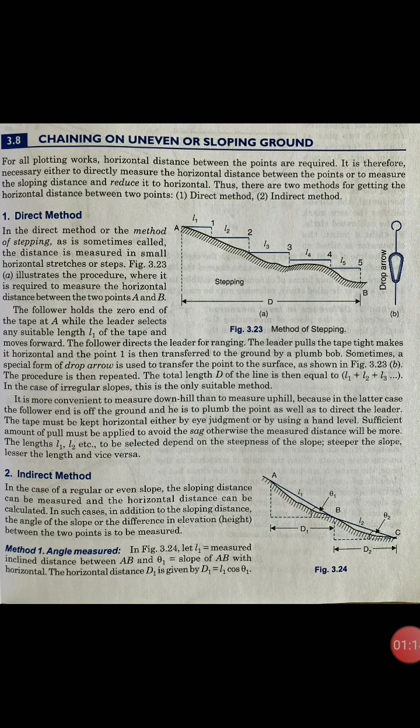So here, to measure the horizontal distance between 2 points which are located on a sloping ground, we have different methods available. You can see here, first one we have direct method, and one more we have indirect method. Again, in indirect method we have different methods to measure the distance between 2 points which are on the sloped ground. Don't get confused with direct ranging and indirect ranging. Both are different. That technique is for ranging and this is for chaining. Okay, this is direct and indirect methods for chaining on a sloped ground.

First one we will study direct method. See here, this method is also called as method of stepping. So in that case, I will take an example of point A and B located at some horizontal distance D. So if I need to measure the exact horizontal distance between point A and B, I should establish the intermediate points such that at the end, if I sum the horizontal distance between each and every interval, I will get the total horizontal distance.

Okay, so you can see here, if I start from point A, I will stretch the tape to some extent, say L1, and I will hold the ranging rod at point 1, and I will drop the plumb bob from point 1 to the ground. Plumb bob I have shown you in the introduction class of the chaining. Once I stretch the tape to some interval, say 2 meter, 4 meter, 5 meter, whichever is convenient to us, say at distance L1, after stretching the tape, I will drop the plumb bob from point 1 to the ground level, and I will transfer the point to ground again.

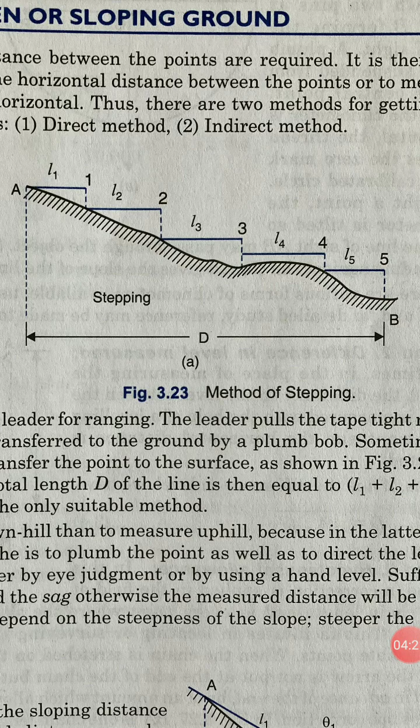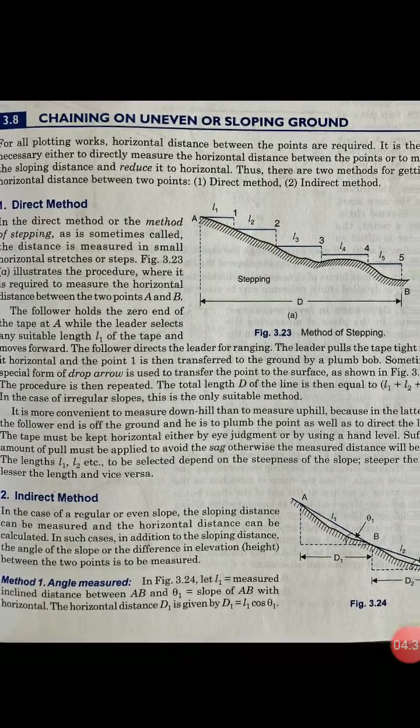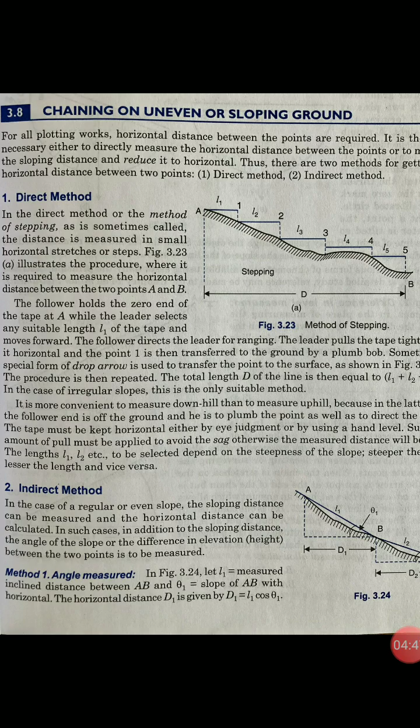Next we have indirect method. In indirect method, again we have various types. So first one we will study angle measured, in indirect method of measuring the horizontal distance between 2 points which are located on the sloping ground. You can see the figure here. So to get the total horizontal distance between point A to C, I have established intermediate point B such that that forms a triangle. You can see the dotted line here, which will give you the angle theta 1 at first triangle and angle theta 2 at the second triangle.

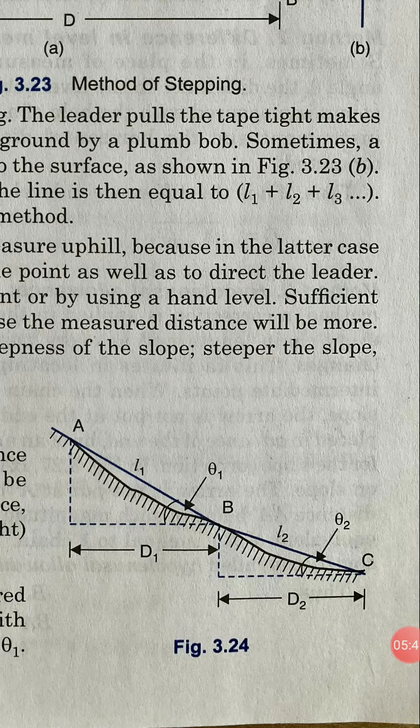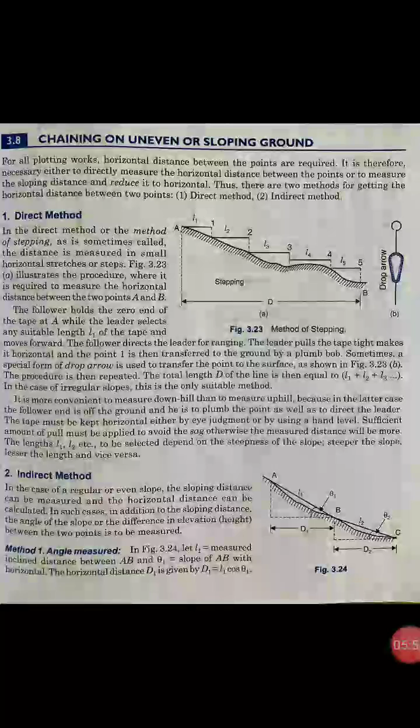So once I get the hypotenuse L1 of one triangle and L2 of other triangle, and the angle theta 1 or theta 2, I can easily calculate the horizontal distance d1 and d2. The total horizontal distance will be again the sum of d1 and d2. So this is indirect method of measuring the horizontal distance between 2 points which are on the sloping ground. First one is angle measured. I am measuring the angle here. See here in figure 3.24, let L1 be measured inclined distance. Inclined distance I will measure. Then theta 1 is slope of AB with horizontal.

The horizontal distance d1 will be then given by L1 cos theta 1. So if I know the theta 1 and the sloped distance L1, I can easily calculate the horizontal distance d1 by using cos equation. Cos theta 1 is nothing but d1 by L1. d1 will give you L1 cos theta 1. The same thing for the second triangle. d2 will be L2 cos theta 2. If I sum d1 and d2, I will get the horizontal distance between point A and C. So this is the first method in indirect method, that is angle measured.

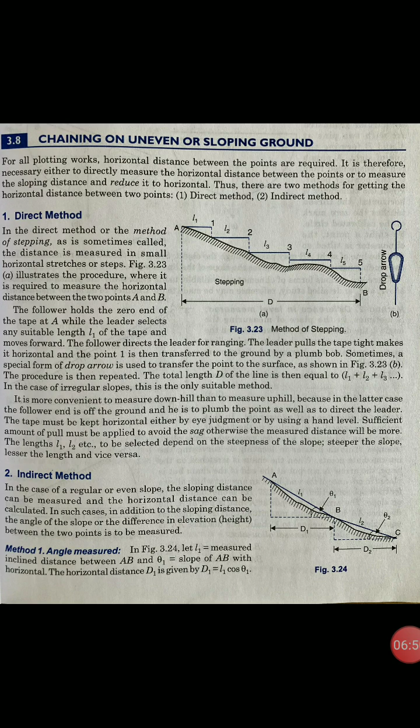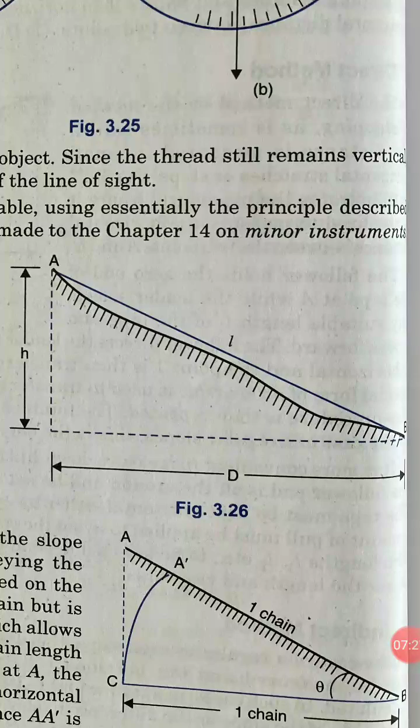So next I have method 2, difference in level measured. Point A and B located on the sloped ground, I will measure the difference in level. That means suppose B is at 0 level, say 0 meter level, I will check the level of point A and it will give you some level on the higher side, that is your small h, whatever they have shown here. If B I consider at 0 meter level, I will measure the level at point A, that will give you the height of the point A, that is h.

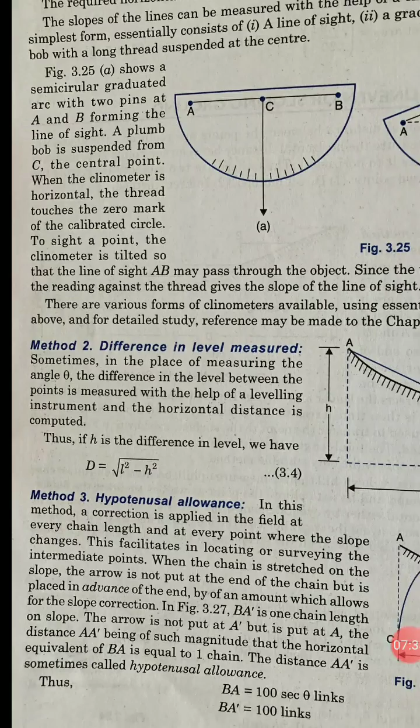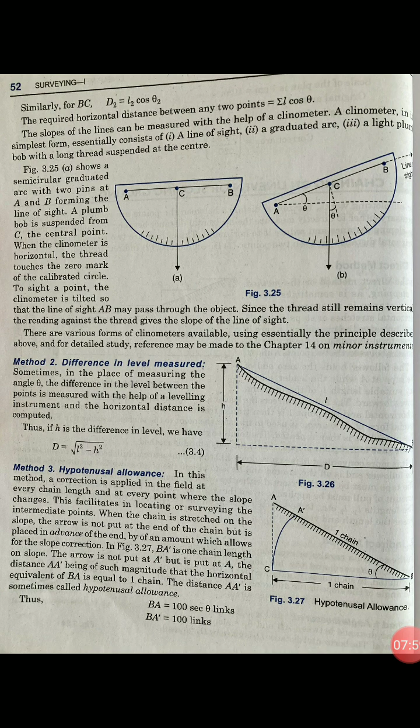Okay, so in that case I can calculate the horizontal distance d forming the triangle, that is inclined distance L and the level difference between point A and B, that is h. Using L and h, I can calculate d, that is d is equal to square root of L square minus h square by using the Pythagoras theorem. So these are two indirect methods of calculating the horizontal distance between 2 points which are located on a sloped ground. In the next session we will study one more method, that is hypotenusal allowance, which will allow us to determine the horizontal distance between 2 points which are at sloped ground.